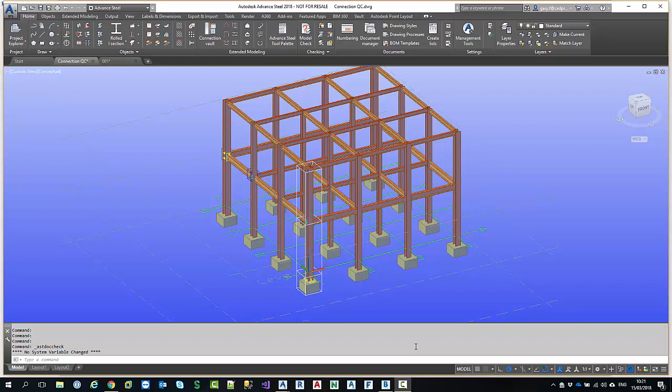So I developed this workflow with BIM 360 Field, Glue, and I used Advance Steel to throw on the connections, but you can use any model that has connections in it, whether it came from Navisworks, Advance Steel, an IFC model, or Revit with the Revit connections. So basically I took this Advance Steel model, pushed it out to Glue, which you can see here. And I'll open up that model.

And there's our model. Now another thing they expressed to me was that they also have to prove documentation on their mill certificates. So I've handled that as well, and I'll get to that. So once you have it in Glue, we push it over to Field by sharing the information with Field. And then here's what you're going to see in Field. This is the start page.

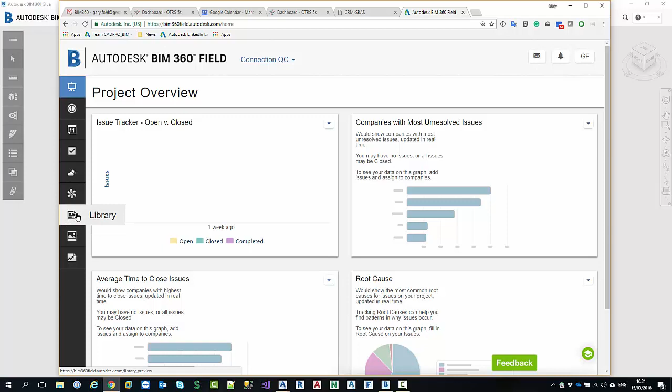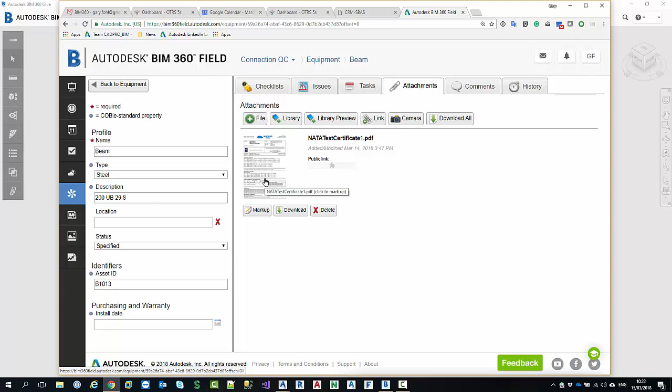Now I'm going to use three of the tools: the equipment module, the library, and the photos. So when I spoke about the mill certificates, in the library I uploaded 2 mill certificates. So in the equipment that's come across, which are beams and columns, if I select any of those beams and look at the attachments, there's a certificate. So when the inspector says, okay, what's with what, you just bring it up, there you go. And that covers your mill certificates.

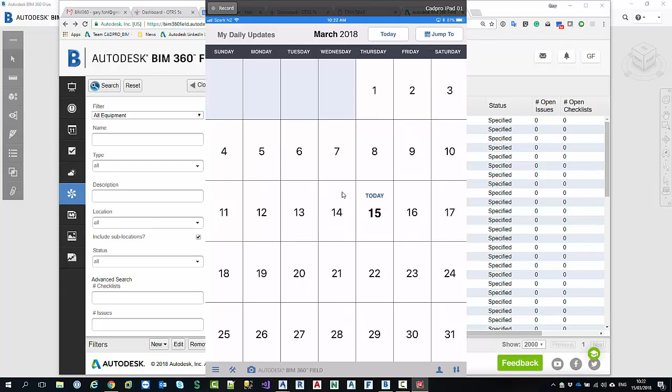So now with the quality control for the connections, it's a bit different. You'll be using the Field app, which is an iPad app. So I'm going to jump on over to that. There you'll see it. And here's one of the screens of the Field app for this project. So your guy in the field is going to use the checklist. Now I've created a checklist specifically for the QC. It's quite simple, just to get through this exercise.

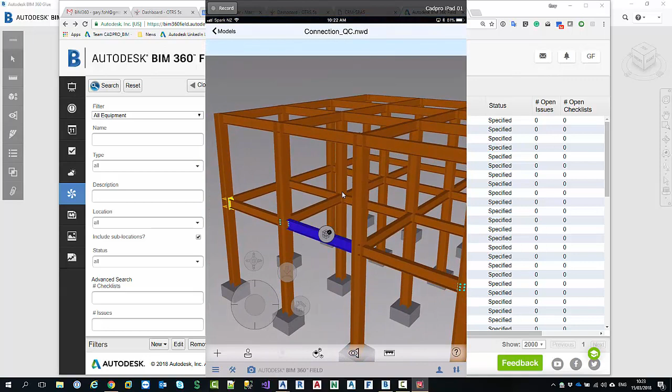But we're going to go to the models and let's say we're going to do this beam here. So I select the information on that beam and there's a checklist associated with it. So I'm going to run another checklist on it. And I'm going to say, okay, bolts, nuts. Well, before we do that, we'll go into the header of this report and provide its location. So we'll say it's level 2, I think it's quadrant 2.

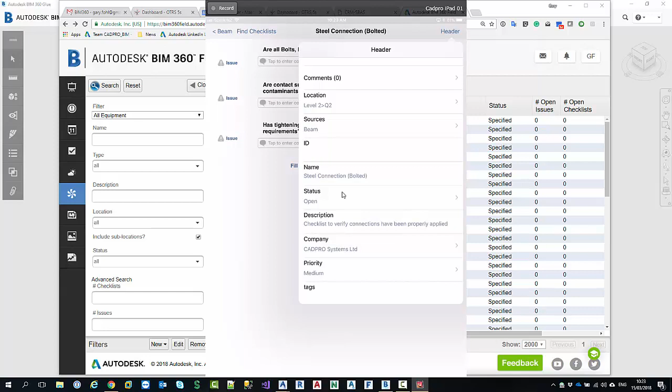You can use whatever locations you've done in the past. And this is the company that's done it, CADPRO Systems. I'm the one doing the checklists. The status is open, and so on. So for now, we're done with the header. We'll go back and start going down the checklist. Yes, yes, yes. So now we want to prove it. So we'll go back to our header and go to our attachments.

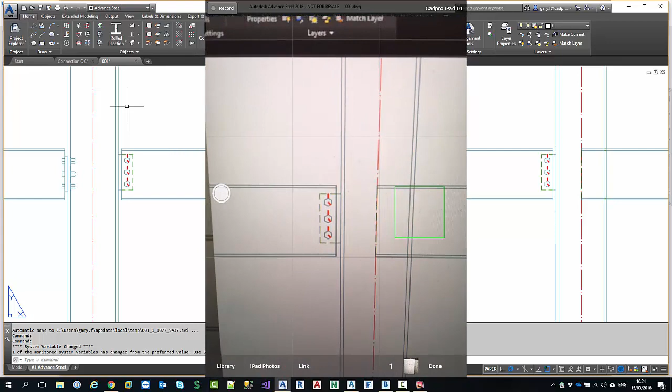So here we're in the field, and since I'm not out in the field, I'm going to use this here. Pretend that's my field, and I'm going to go out there and say, there's that connection. See the paint stripes on it? I'll take that photograph. I'll go over to this side and I'll take that photograph, and I'm done. So now I have these 2 photographs in my data.

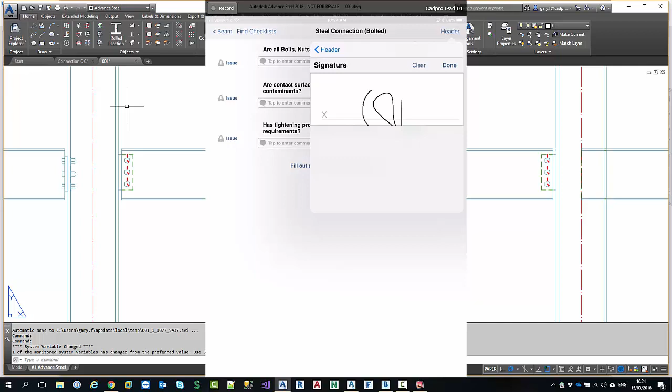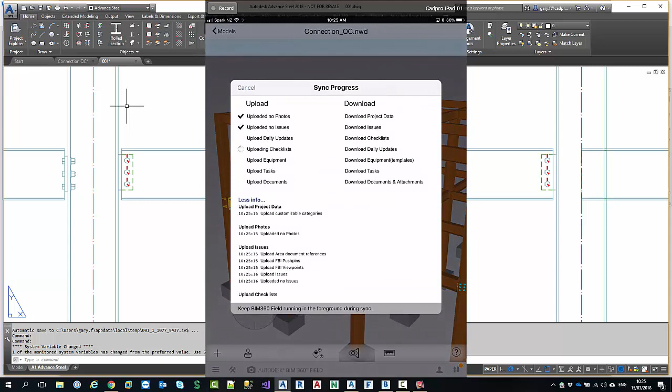I'm going to go back to the header and I'm going to sign this off. Done. Now I can say this is closed. I've done it. And going back, and I'm done. So now I'm going to sync my work. And that's basically all we're going to need from this now. So once that's been synced, I'm going to get back in Field and wait for this to happen.

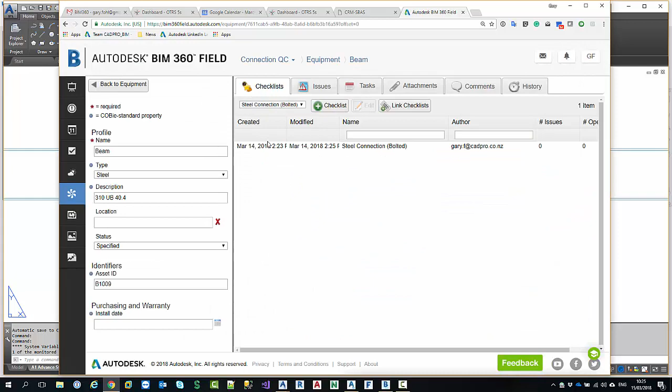And I guess we can go to the photos and just have a look. Oh, the photos are already up there. I'll go back to my equipment and see what's going on. Oh, there we go. That's the beam 1009. You can see there's this checklist. So now I can go to this beam. There's the checklist. Double click and open it. And I have the data that was captured, as well as the photos, to prove that it is as the checklist says it is.

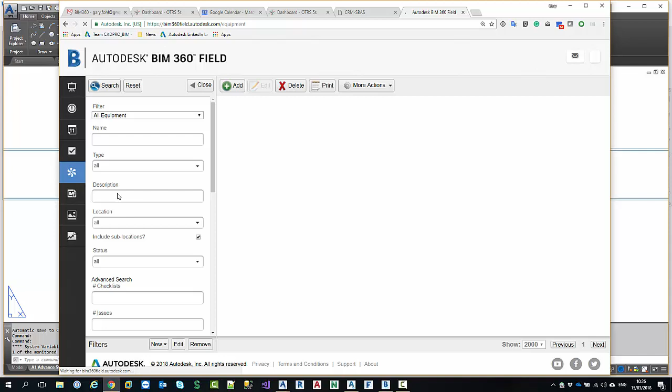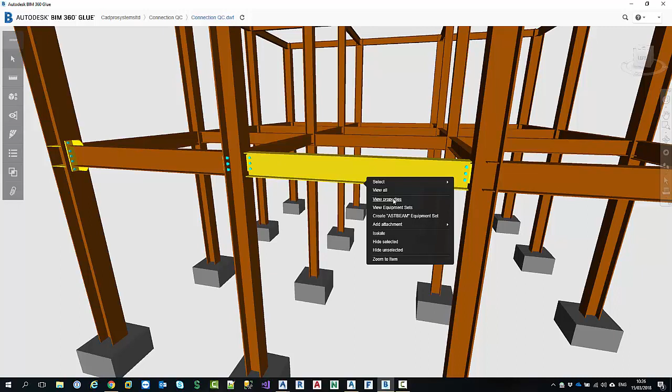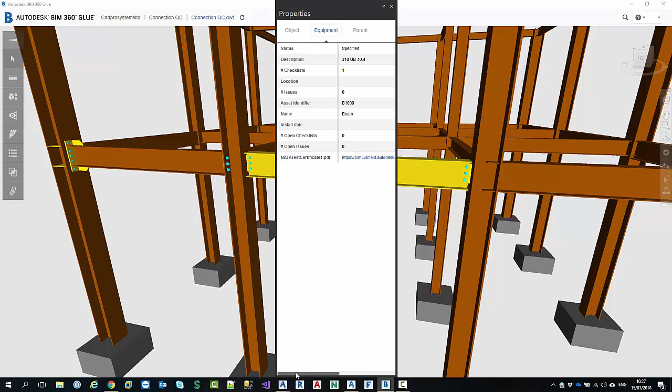So as you see, that's a very effective and lean way to provide your QC on connections. Now, let's say we go back to the Glue model, and I'll get to that beam, which is over here. Now I go to my properties, equipment. There's that mill certificate. And it's no longer an open checklist, it's closed. There's the one checklist here, so I can see that this checklist has been done. So I can get this information and pass it on to anyone that's interested in it.

So that's it. If you'd like some more demonstrations or examples, or to talk to me more about how you can utilize these tools for specifics, I've done it for forensic work as well, to go back into existing buildings and track defects and fixes to those defects, and it provides you a nice clean way to have the documentation handy for anyone who wants it.